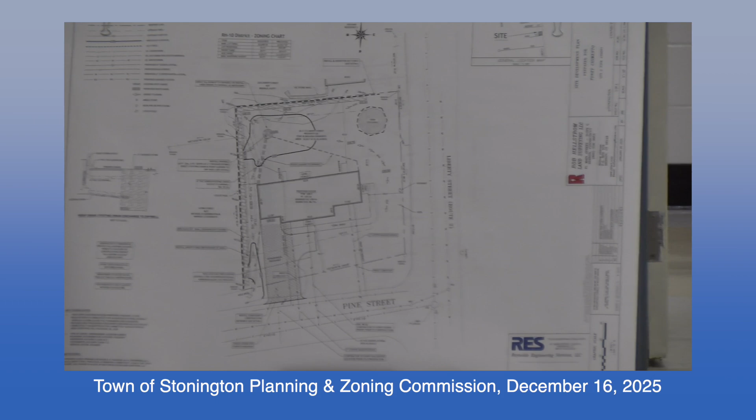The blue here is the only section proposed to be in excess of 59 inches. Everything else is less. We added a lot of detail to the proposed contours and spot grades here to demonstrate the micro-grading required to convey all runoff to the rear of the property.

The key thing is that we're not proposing any point discharge of runoff, surface runoff, or from roof leaders or the footing drain outlet anywhere near or at the property line. Everything is directed to the rear, to the dry well. We have erosion and sedimentation controls all shown on the plan, all typical things. A safety fence is proposed at the high side of the wall.

If anybody has any specific questions about the site plan, or if I can provide any clarity, I'd be happy to. That's basically it here.

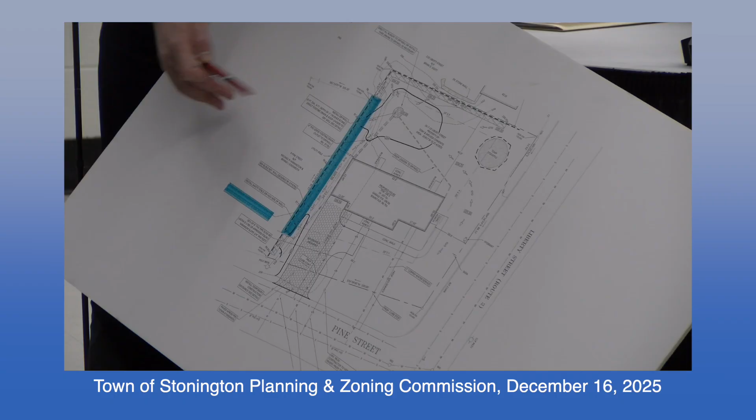As far as soils go, I'll talk briefly about them. These are all, per NRCS, excessively well-drained sands and gravels. The one recommendation from Steve Trinkus, the town engineer, was to do a confirmatory test pit in the area of the dry well. The applicant is happy to accommodate that and schedule it with him, but everything else has been reviewed by town staff and addressed in the revisions to the site plan.

Which street is Pine Street on there, to get my bearings? Route 2, Liberty Street. But on that map shown in that picture—he's trying to figure out which is Pine Street. That's Route 2, here's the main road, Route 2, it's Pine Street.

Pine Street, okay. So can I ask a couple of questions? Above 59 inches, what's the total height, or the highest point of the wall? The highest point, right at the pitch point, immediately along the west side, the left side of the structure, is a little over 8 feet at the highest, and then it quickly goes down. There's a spot down there around 96 and change, that's the lowest point existing, so that would be the highest exposed face of wall.

Next question, are you going to keep it this block material, or what's it going to be? Yeah, it's going to stay that material. Identifying this as Tony Cimento—yes, it's going to stay that material.

At some point, could somebody just talk about how we got here? You started building, I drove by there today, and there's obviously a big height difference between the other house. I don't think that neighbor's going to be here, but let's go through it. So, my client is the builder, and as you know these days, he's trying to put construction infill into a lot that was pre-existing. So when you do that, and we have Charlie Elias here, our engineer, as well as Jason—

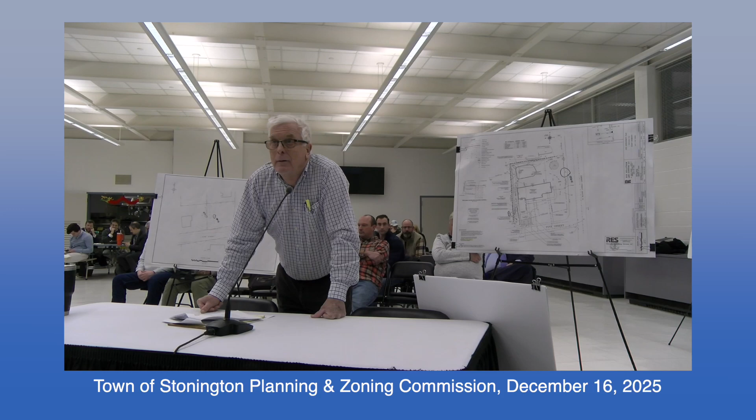So this first map is the map that accompanied the application presented to Mrs. Palmer in February of 2025, February 13th to be exact. And as the applicant has said, he purchased the property in December of 2024. The first thing you should note on the map is that it was created on January 20th, 2025, approximately one month after the purchase of the property.

Now I want to show you what the map represents in terms of topography, because we all know that water flows downhill, and the topography is an important criteria for the zoning enforcement officer to judge compliance with the permit. So if you look on the eastern side of the map that abuts Liberty Street, you will see an elevation, a contour.

And that contour is 106 feet above sea level. I would then direct your attention to the western side of the property that shares a common boundary with my client. This map indicates that western side has an elevation of 98 feet above sea level. So essentially, this map portrays the lot topography as a gentle slope over the depth of the lot, which is 95 feet.

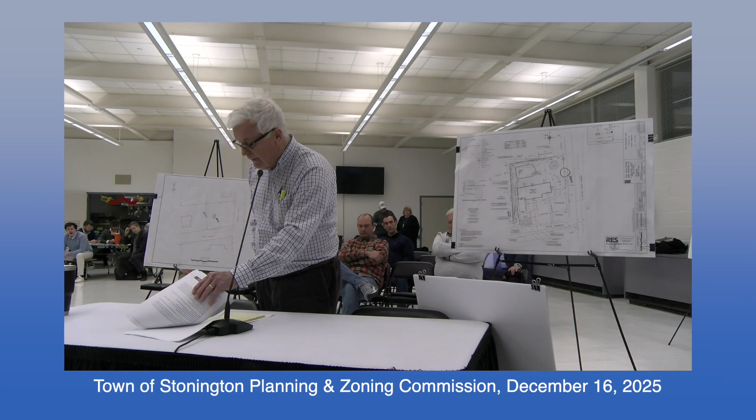So what I want to tell you historically is that the information that was provided to Mrs. Palmer may not have met that bold capital caveat that people encounter when they seek a zoning permit. That is, it may not have provided, and I quote, 'This application cannot be approved until all required information is provided.' I'm a proponent that this map, reflecting the accurate topography of the property, is required information that is provided, and the application cannot be approved until that accurate information is provided.

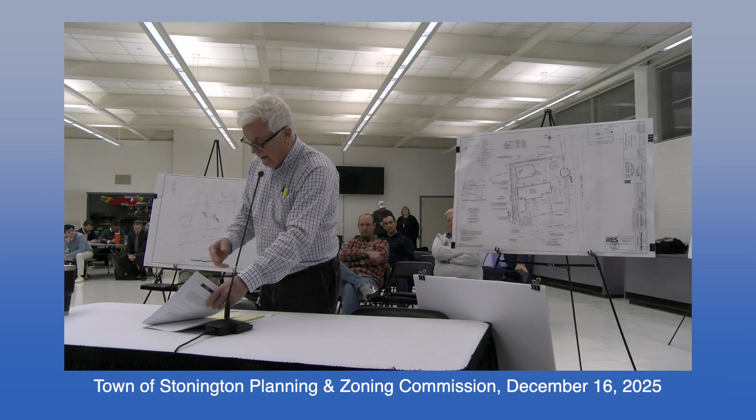So the other approach I have to this matter— Are you about to wrap this up, sir? No, I'm not. How much time do you think you're going to require?

I stated in my letter that I've been a practicing land use attorney for 42 years, and I estimate that I would take an hour to make this presentation. I have 3 expert witnesses, and that's just the way it is. These people have every right to protect their property rights, and I alerted the commission as respectfully as I could. And I hope that satisfies your query about how long I'm going to take and how long the witnesses that I'm going to present.

I have embraced that notion since the moment I got up here. So my approach, unlike Attorney Avina, is that you have to examine every regulation that is germane to this application. Not only do you have to look at the regulations, but you have to go ahead to Chapter 20 and look at the zoning definitions and terminology. Because how the heck can you understand a regulation if you don't know the definition for the words that comprise that regulation? So I took a deep dive into that.

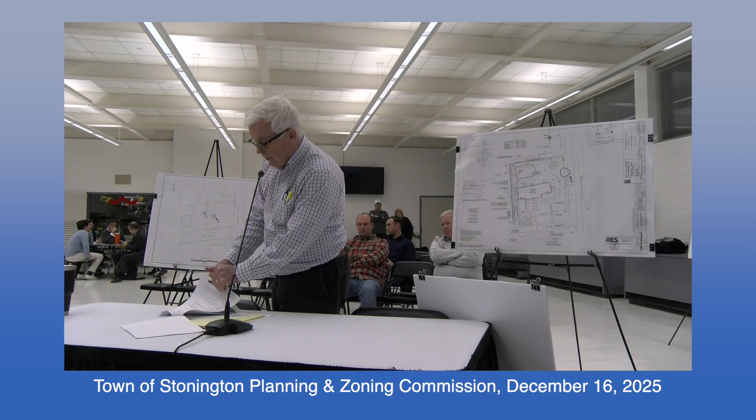Then, in furtherance of his pursuit of this, he filed an impact statement. No mention of earth in that impact statement, only the mention that he would not be able, but for the wall, to keep all of the water essentially on his property. So now you have an applicant for a major retaining wall, describing his project as retaining water, and providing an impact statement on how the wall will enable him to retain the water.

One of the ironic things is that because it's a special use permit, and because regulation 12.4.9 makes the assertion that the Planning and Zoning Commission finds that this type of wall has or could have a negative impact on adjoining property owners—this regulation was adopted in September of... I'm in another century... September of 2020, authored by the former planning director, Keith Grimes. And when he provided this, the commission recognized the negative potential impact, adverse impact, on the creation of such a wall.

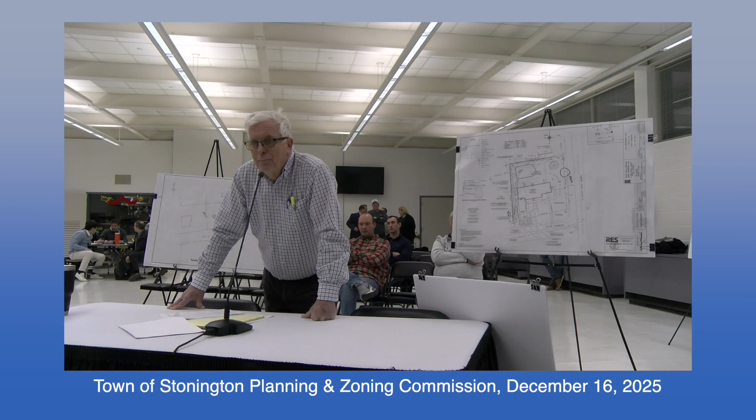You look and carefully examine the applicant's application, and you don't find any kind of reference to a buffer, to any screening, to any landscape architectural plan, nothing. The Lemkes started in November of 2024.

They submitted a landscape plan to this commission, and the commission rejected it and told them to provide something better. So in February of 2025, they presented another landscape plan, which gained the approval of the commission.

Just by way of comparison, the applicant's application might be 12 pages long if you include the list of abutters. The Lemkes' application is 192 pages long. It has a series of engineering drawings, two separate landscape plans, and most importantly, the wall is on the Lemkes' property.

I can tell you with certainty that since 2020 and the adoption of this regulation, no applicant has been approved for a retaining wall on the adjoining property owner without a buffer being on their own property.

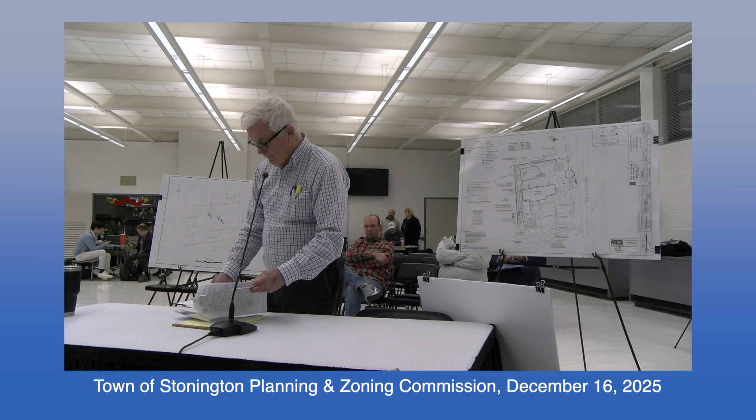He addresses this letter to my client and says: 'In my opinion, the height of the proposed wall and its proximity to the dwelling located at 4 Pine Street would have an adverse impact on the market value of 4 Pine Street. Also, since the wall is proposed to be located on the property line, it would require the owner of 4 Pine Street to buffer the wall in order to limit its impact.'

So now, in order to preserve and protect the value of his property, instead of leaving his house every day and mowing the lawn and looking at this behemoth wall, he has to use his own property to buffer the wall and preserve the value.

That's a taking. When somebody has to use their land for the benefit of an adjoining property owner - and I'm not talking about voluntary trades of boundaries, which people make all the time - in this case, there was no overture on the behalf of the applicant saying, hey, I'm going to put this wall up, where would you like the buffer to go? They don't want it on their property, but they require it in order to preserve the value of their own property.

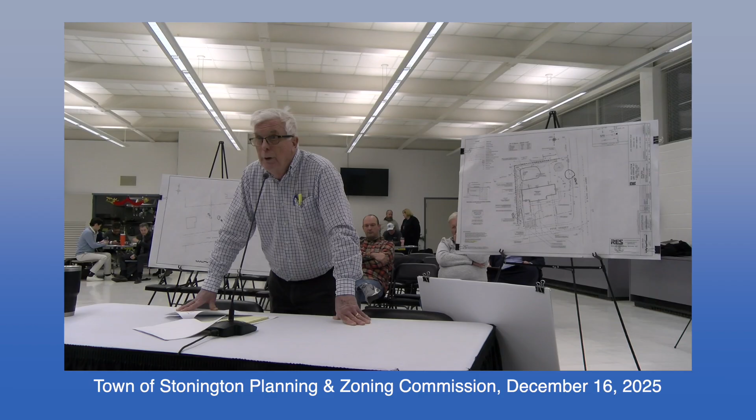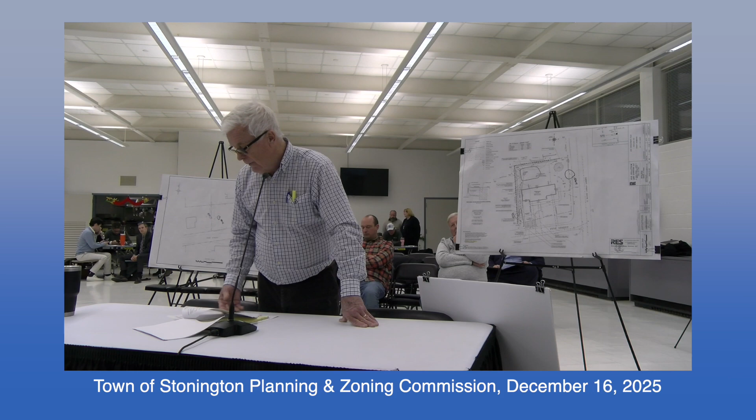If you look at the map that was prepared by them, you can see that this principal residence and accessory dwelling unit are pushed right up against the rear of the property. I'm told that an intelligent builder builds to the condition of the land that the structure is going to be on. This is hardly an application that takes that into consideration, and Mr. Erb recognized that and had no qualms about presenting that finding.

Now, one of the things zoning is supposed to do, since it's the lawful enforcement of property rights, is to place safety valves or safety precautions in their regulations to prevent as much adverse impact as possible. That's why the Lemkes' application is 192 pages long.

That's why they came to you knowing they'd have to provide landscaping plans - to protect against adverse impact on adjoining property owners. And they sure as hell didn't consider having to put the buffer on someone else's property.

And that's what this gentleman is proposing to do. This commission, for a number of reasons, should deny that application. First of all, it's not a retaining wall. It doesn't meet the definition of a retaining wall, and it doesn't retain earth. It's to retain the water on his property.

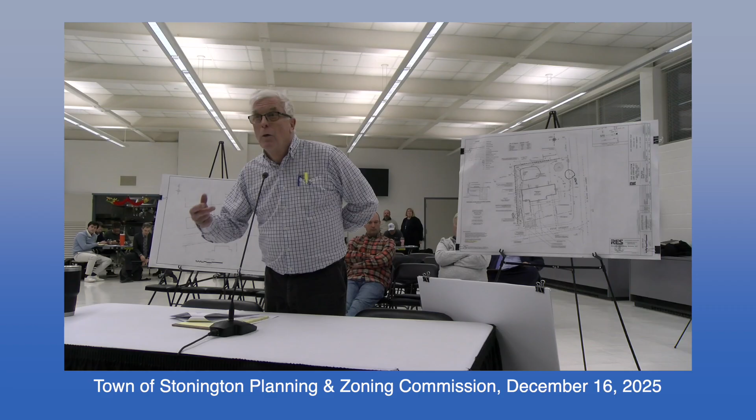There's nothing preventing him from coming back and correctly asking for an application to conduct an activity that is defined in the regulations and provided for in the regulations. He asked for the wrong thing.

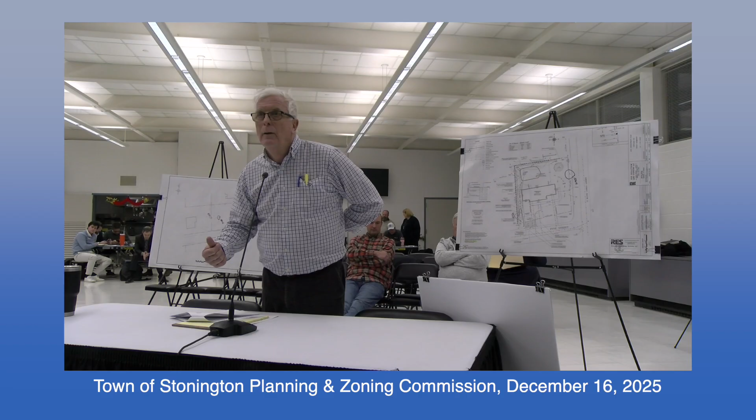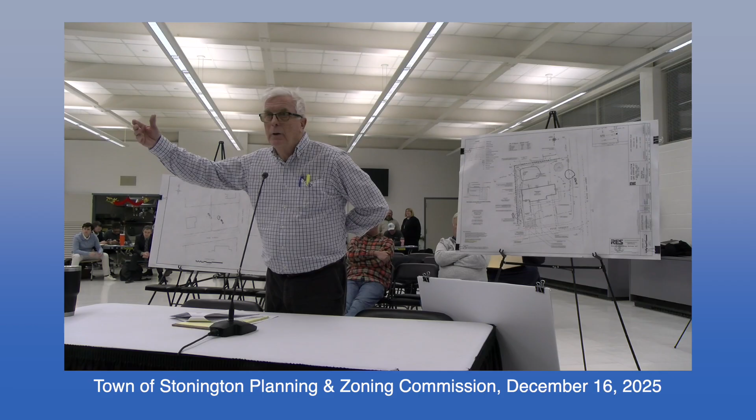He ignored the fact that the topography that was existing would require a major retaining wall. He ignored the fact that once the property was developed, he could go ahead and put a 7-foot retaining wall until the zoning enforcement officer said, wait a minute, that's not what you asked for in the application, and that is not currently compliant with the zoning regulations.

So if you want to keep a 7-foot wall, you're in violation of the regulations. My duty as the zoning enforcement officer is to enforce those regulations. You're in violation. Take the wall down to 59 inches and go see the commission about an application for a major retaining wall.

In doing so, he did not focus on anything but his primary condition, which he agreed he represented to the zoning enforcement officer he could accomplish without any other approval. Now, the gentleman has every right to come in and modify his application, to say, 'Hey, I have recently discovered the need to have a major retaining wall.' He didn't do that. He built the wall. She told him to take it down, and he applied here, furthering his quest to meet that condition.

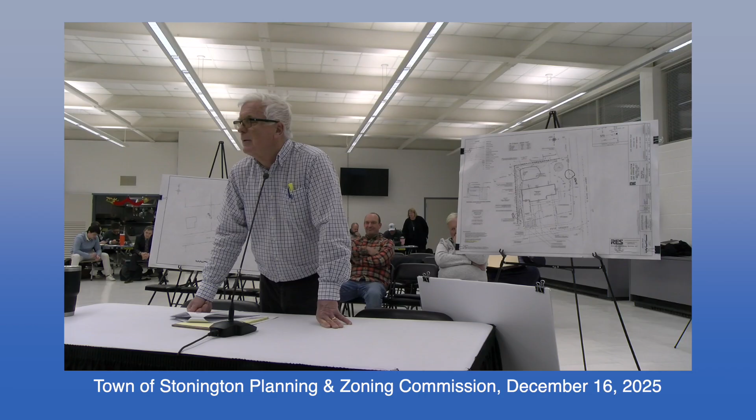I'm going to ask you to wrap this up. You can submit whatever you want in writing. I'm asking you to wrap this up. We have a long meeting tonight. We have 6 other people that want to speak on this application, and you've already taken a half hour, and you're rambling. You're saying the same thing over and over again.

Well, let me be succinct. And first I should apologize to the applicant because maybe what I'm about to say might not be viewed as complimentary. But I would say to the commission succinctly that since day one, the applicant has misrepresented his plan to the zoning enforcement officer, to the detriment of the neighbor.

I'm going to have to object at this point, Mr. Chairman. We have the zoning permit for the property. The zoning officer is fully informed of all the circumstances of the property. The only reason we're here tonight is the difference between 60 inches and 105. That's all we're looking for.

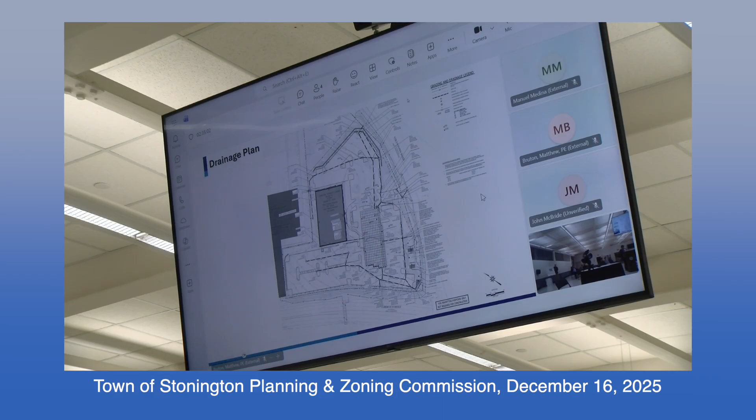I did fit that. That's a good one. I can double check for you. Thank you for the brevity. I don't know off the top of my head. Give me a second.

We talked about at the last meeting, the chairman asked whether or not we could. So in your first go around, this was one development. Now it seems to have turned into two separate developments, and there was some shared parking, some driveways that connected.

But... and I probably should have asked the landscape architect that last month, but I.

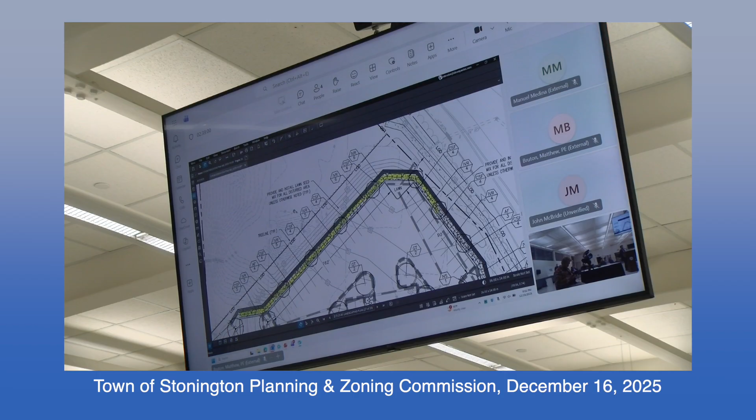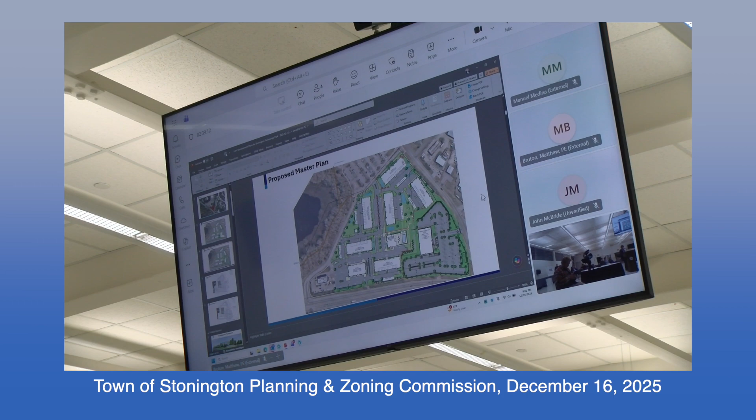As I've said before, this project wants to move forward quickly, so you are accepting a new application for phase 2 of the residential buildings, which will show the interconnection at this area, because there's going to be a residential building there. We have those master plans, and we'll talk about them — just to preview a little bit, there'll be opportunities there for landscaping as well.

Just one more question because I'm nosy — what's the material for the walking path? Is that going to be gravel? We haven't fully decided what's most appropriate there, whether it's bark mulch or something similar that allows recreation without increasing impervious area within that wetland upland area. It shouldn't be asphalt, especially not up by the pond.

Any other questions? I have a comment. Commissioner Morrison? Fine, whatever.

We talked about this a little bit last time — it's a lot of parking for the building. Is there a way you would consider doing a phased parking approach? Do your regulations require that? But 320 also allows for phased parking. Yeah, so we do show one more space than what's required there.

There's been some talk about potential tenants and what they'd need day 1 versus year 1 versus year 10. So we're open to considering that, but at this point we don't have a firm commitment on who's occupying the building. We may come back requesting deferment of some parking when a tenant's more well-known — meaning you don't have to build it all immediately, and if you don't need it, that's something we'd seriously consider, since it's less impervious area and less money for paving.

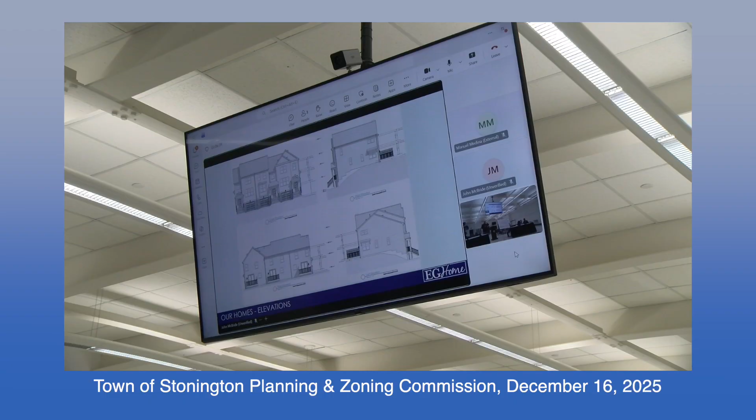And then we'll go through the landscape plan as well, showing some of the things that came up from the Architectural Review Board. Do we have the landscape plan? We have landscape, okay.

I'll put on my planner's hat for a second. The ADRB asked us, we had done an initial landscape plan that we submitted with the application. Staff at the time, when Clifton was still here, asked us to put together a more detailed landscape plan. So this is what we showed the ADRB, which got a positive reaction.

We've got a variety of street trees down the private drive that serves it - some red sunset maple, some green giant arborvitae, and some green spire linden on this major access way. What's really important though is, you can go back to the elevation. It was important that we provide landscaping in front of these units as well. Because they have garages accessing them, we have to keep those travel lanes open, so we have these islands interspersed into the fronts.

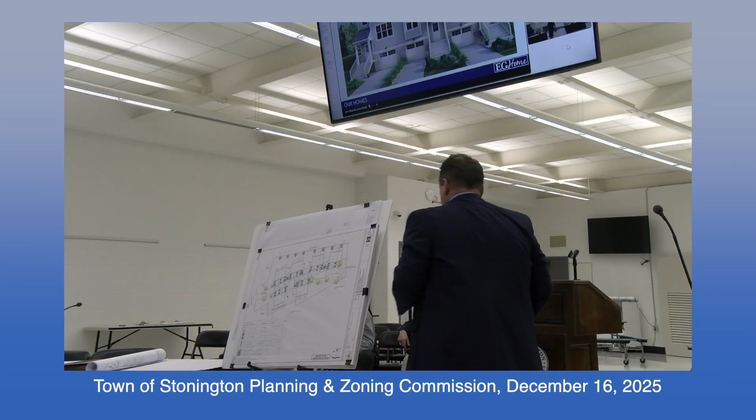Thank you. Any questions of the applicant's attorney and the technical team?

I'll start with one. In Clifton's report, he had asked you guys to consider a sidewalk that goes out to Palmer Street. Any movement on that?

Yeah, I can talk to that directly. We've talked about it at ADRB a little bit too. Just to be clear, there are sidewalks on Palmer Street already — the planner's report seems to suggest there aren't, but there are. The suggestion was to put in an internal sidewalk. We don't want to do that in front of the units because it would blow out a lot of those planting areas. It's 18 units, it's a small project, and it's effectively a dead-end road, so there's not any through traffic.

I talked with my clients before the meeting, and this was something we discussed with ADRB as sort of a compromise position. One thing we'd be willing to do is put a sidewalk from the end of these units out to Palmer Street. We've got a mailbox area, and we could put that in as basically meeting halfway. We don't want to blow out landscaping to put in pavement, but we think we can do a sidewalk to connect into Palmer Street — that would be about 100 to 150 feet to get out there. We think that would be a reasonable compromise, and we'd be willing to do that if that's something the commission would want as a stipulation.

How's the commission feel about that? I think it sounds like a good idea. Sound good to everybody? Any questions on it? Okay, Bill, thank you. Any other questions? No other questions. Thanks for bringing that up, though. Candy, any comments from the staff, Rob? None at all.

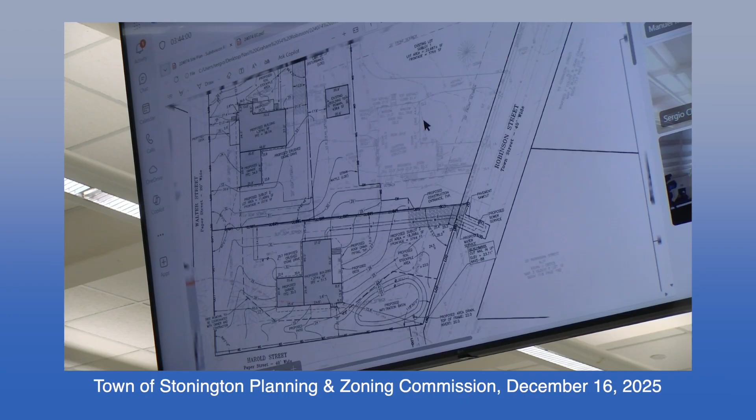So I do want to add that to the south, that stream, there is an associated stream with the wetland. We did obtain Inland Wetlands Commission approval prior to coming here this evening, so that has also been approved.

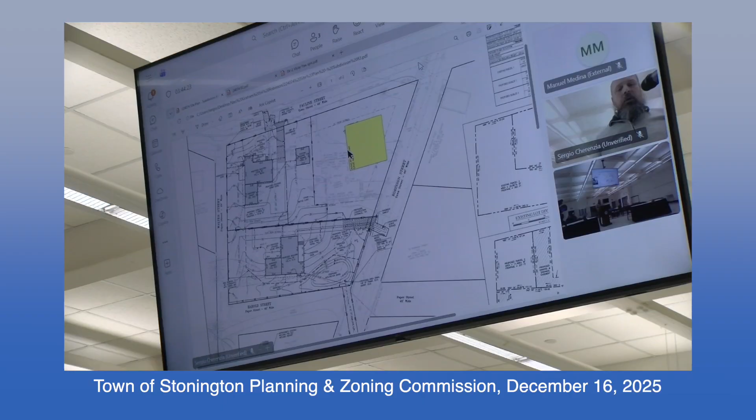The town engineer did have some additional comments. We've been going back and forth a couple of times. I'll give a quick synopsis of those items which I think will be handled at final plan, and we are happy to stipulate such. In summary, he's looking for a recorded subdivision plan that has the appropriate easements, cross easements for drainage between the properties. We are happy to accommodate that, and we'll do that to the town engineer's satisfaction.

As I mentioned, all of the drainage is directed to that infiltration basin on site, where we've done some infiltration testing, and we're confident that that area will adequately handle the stormwater from the site, hold that water back, and safely convey it underneath the road, as opposed to causing any concern for potential overflow over the top of that road, and any adverse condition there.

The town engineer did make a comment on saving a large oak tree on the property. I don't believe there's anything that requires my client, as the owner applicant, to save that tree, although if we are able to navigate around it by modifying the site plan in such a way to save that tree, I think that's something that can be administratively handled, and we can still maintain the integrity of this plan. So if it's possible, we will try to save that large tree on the property.